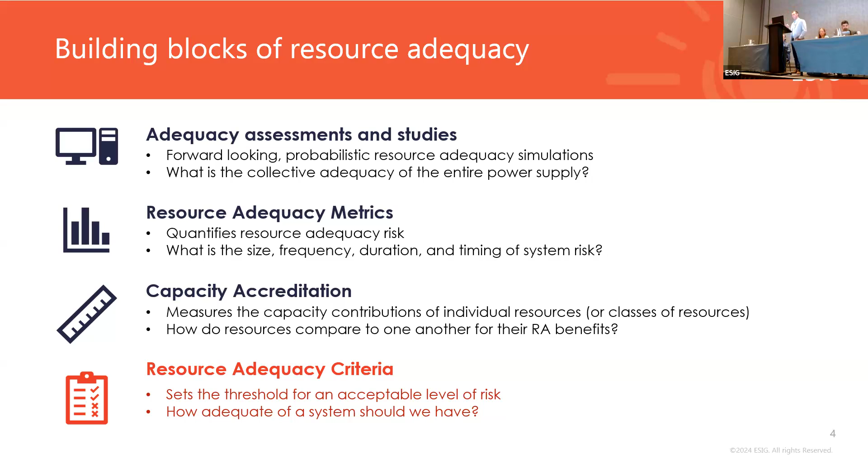So again, when we first started this task force, I felt daunted going in and trying to say this 1 day in 10-year planning framework that we've been using since the 50s, do we want a change to that? It's a lofty ambition. And so before we started, we did several surveys. The first question was, should the industry consider a new resource adequacy criterion? Should we move past that 1 day in 10?

We ran this across 3 different surveys. Nothing scientific about these surveys, but there was an ESIG webinar on probabilistic resource adequacy methods, with 116 people participating in the survey. We had the task force, we got 32 participants, and then we had the IEEE resource adequacy working group with about 30 participants too. An overwhelming 75% of people said, yes, we need to move past the 1 day in 10-year. I was frankly surprised to see that many people on board.

And the second one was, if we had to move away from one resource adequacy criterion and we had to pick one, which one would we pick? And here, this is a little bit of an unfair question because we gave a multi-metric as an option. So we gave people a little bit of an out, and that's what most people chose.

It said really one metric is insufficient, so we need to have a combined approach or multiple metrics. And really, the fundamentals, we go over this in the report, but the limitations of the current use of LOLE at 1 day in 10, and in Europe it's loss of load hours, but a very similar construct around how we measure risk. So right now, in many places, it's a line in the sand, right? We determine a system is either reliable or it's not, whether or not it meets the 1 day in 10-year criterion. In reality, reliability is this continuum, right? And it's all about this trade-off between cost and reliability. And today, again, we're treating in most regions this as a line in the sand.

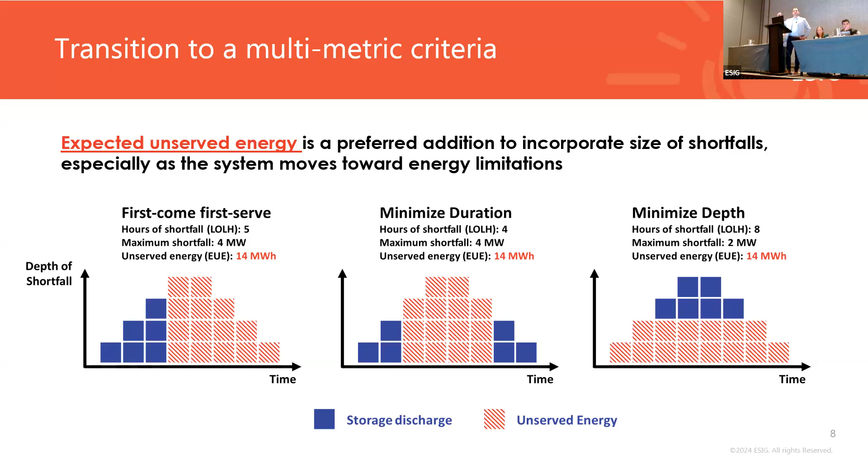And so this is just an example as you move to a system that has a lot of storage as the primary source for reliability, the way you dispatch that storage, you can make your resource adequacy metrics do whatever you want. You can try to make them shorter, you can make them less frequent, but what stays the same across every case in an energy limited system is expected unserved energy. So it's a more stable metric, especially when we look out at an energy limited system.

It's basically saying let's look at my full distribution of outcomes in the resource adequacy study, where we might have hundreds or thousands of samples to choose from. And let's look at the tail end of that distribution and let's cap it. So we could say, I want to make sure that 97% of all of my shortfalls are 8 hours or less, right? And we want to make sure we're capping how bad that worst case can get.

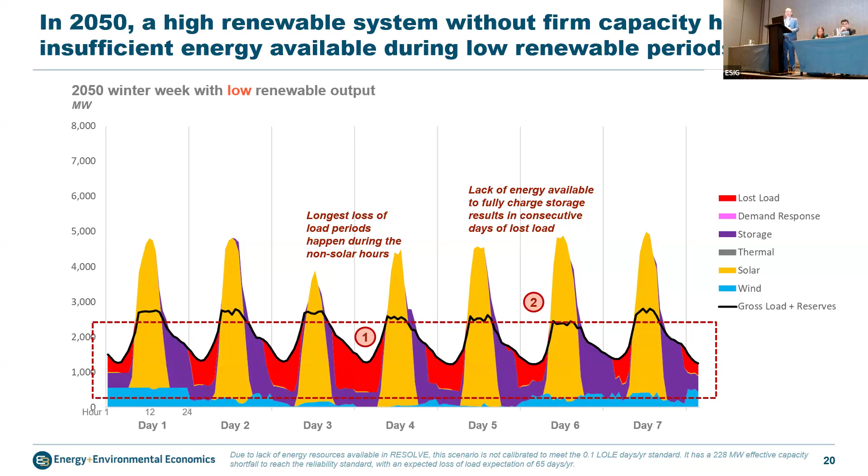They're going to be large energy shortages that occur typically in winter. Even in Hawaii, there are seasonal differences in the amount of solar production, and there may be long periods of cloudiness, and they might run out of energy. And that's what you're seeing on this graph. I know there's some concern among various analysts that the standard loss of load ELCC methods might not be robust enough to address this type of concern in addition to the one that we saw on the previous slide. And so that's what we're going to talk about a little bit in this presentation.

So just taking a step back on how we traditionally consider resource adequacy, we typically will do something like calculate a resource need. We'll do that by running a loss of load model, and we'll add capacity until we meet our standard, whatever that standard is. Usually it's 1 day in 10 years, as Derek said, 0.1 LOLE, but it doesn't have to be. It can be LOLH, it can be EUE, it can be a number of different standards, but you have to have a standard. You add capacity until you meet that standard. The amount of capacity that you add, that's your total need.

And then the reserve margin is the residual calculation from that, where you divide the total by your 1-in-2 peak load, subtract 1, and that's your percentage reserve margin. It's a residual calculation. It's not a thing by itself. That's something that people often lose sight of, but it's useful just to help you understand how much extra I need across a broad variety of scenarios.

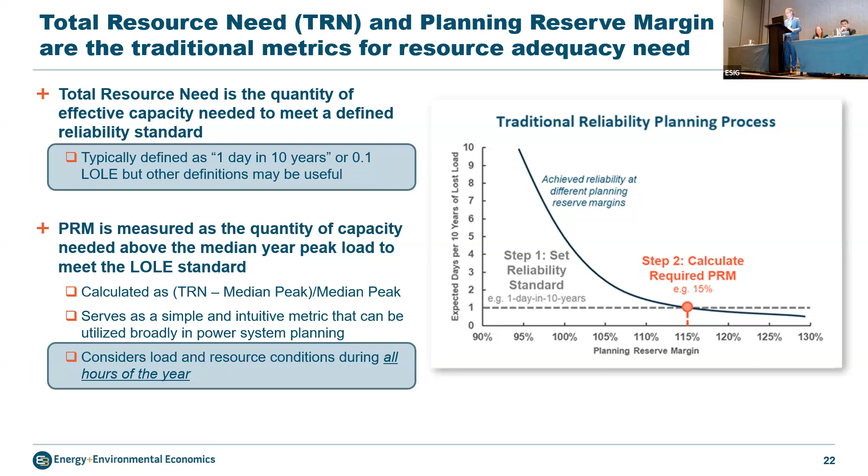Now, this ignores a whole bunch of things that are changing. Our world's getting more complicated. I think it's well understood by now that there are interactive effects among resource types, including cannibalization and diminishing marginal returns. As you add more solar, you push the peak into the evening, the next tranche is less effective. As you add more battery storage, the next resource adequacy problem becomes more elongated, and you have to add more hours to continue to have the same effectiveness.

So that's well understood. It's also, I think, by now well understood that when you add solar and storage together, the whole is greater than the sum of the parts. They complement each other, and so you get more out of them. That's just an example of the type of interactive effects that we now have to consider when we calculate our resource need and when we do our resource accreditation.

Another way of thinking about this is that the way that we've done resource accreditation in the past is kind of nice and simple and linear. We could do it this way because we had small differences in performance among different resource types during the times that matter, and largely no interactions between resources, or at least ones that we couldn't ignore. And we could do performance penalties to incorporate forced outages.

So you could pretty much just add up the nameplate of all the resources, add some extra for the margin in case those resources weren't available when you needed them. And then you built to that standard. And so your installed capacity was just kind of the sum of your nameplate capacity. Nice and simple. But it turns out we were living, we didn't know it, in a linear simplification of actually a much more complex problem.

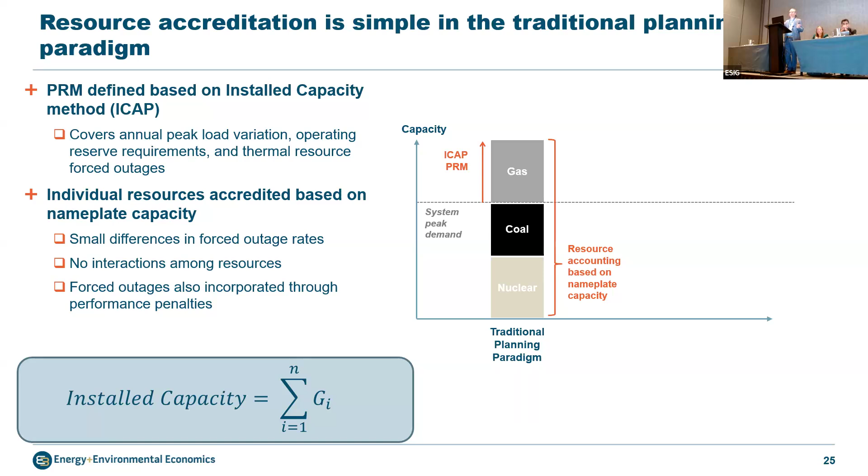What we have now are large differences in availability during the key hours, significant interactions among different resource types. And so our portfolio ELCC, the combined capacity contribution of all the resources, is no longer a simple linear sum of the individual resources. It's now a complex function. And we need to change the way that we think about doing resource need, measuring it, and doing resource accreditation. So it's not just the sum of all the nameplates, socializing the forced outages. We now have to look at each resource on its own and consider how it performs during the most important events.

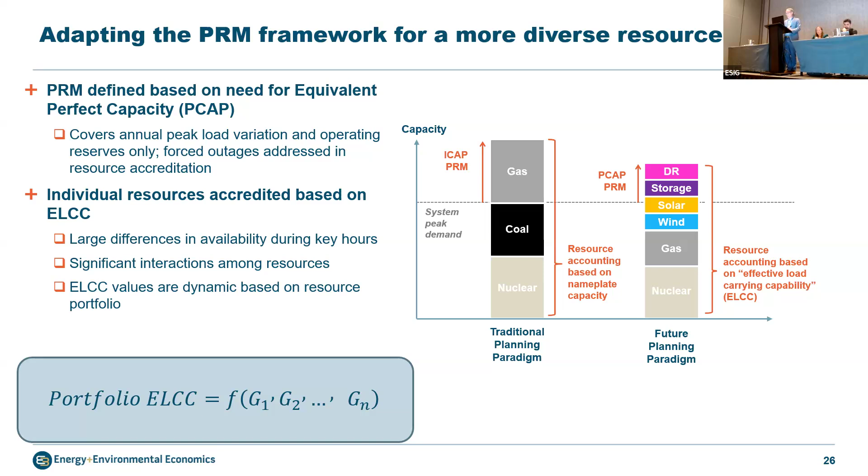Another way of thinking about this is that the portfolio ELCC is a complex function, as I said, of all the resources that make up the portfolio. It has this convex shape that as you add more megawatts, the effective capacity that you get from all of them tends to diminish. The height of the surface is the total amount of effective capacity from the portfolio.

But what we're actually interested in with respect to resources is how much each one helps us meet our total need. So if I make a small change in the total portfolio of one type of resource, then I measure how much that helps me meet that capacity need. That in effect is a partial derivative of this multidimensional surface with respect to that one resource's dimension. So that's the marginal ELCC, and that's the quantity that we're interested in and need to look at when we're thinking about making changes to the portfolio. How much does this marginal change help me meet my total need, whether that's a retirement or an addition of a particular type of resource?

So we think of the total need as a surface, a multidimensional surface that's made up of all the different types of resources that are part of the portfolio. And we'll come back to this surface in a little bit. So just keep that kind of image in mind.

So with that background, now what did we do to test the different resource adequacy methods on Oahu? So just to give you a little bit more detail about how they do it now. Again, I mentioned the hourly energy reserve margin and the hourly dependable capacity, HDC method. So this is a homegrown method that they came up with. They, in effect, make sure to plan their system so that they can have a 10% margin in every hour.

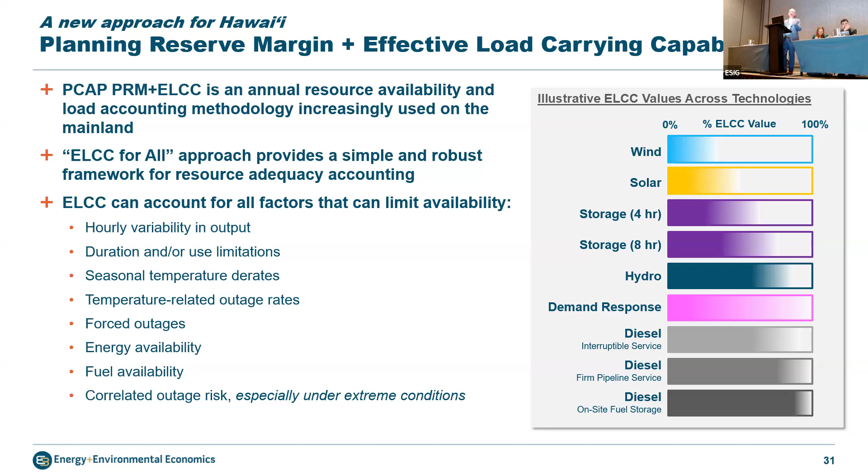ELCC, in our experience, accounts for really all of the factors that can limit the availability of a resource: variability in output, duration, seasonal temperature derates, forced outages, energy availability, fuel availability. Really, all of that goes into the model and affects how the resources perform during your simulation. And it does consider extreme conditions, which, as Derek talked about, are very important.

Back to the surface. So the way that we actually incorporate different levels of wind and solar and battery storage across all the potential different futures between now and 2050 is to take that surface that I talked about before and try to measure different parts of it, the parts that are important for their portfolio construction. And the way that we do that is, in effect, measuring marginal ELCCs at different points along that curve, different saturation levels, and different combinations of wind, solar, and battery storage.

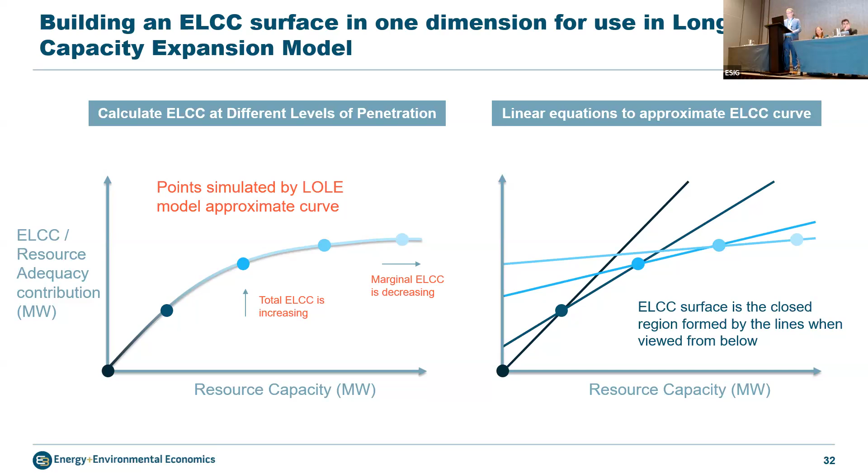We can use those different measurements to make a linear approximation to that convex shape. That's what you see on the right. And then we incorporate that into the capacity expansion model as a series of different linear constraints that say, as I go up that saturation curve, then I piecewise linearly reduce the amount of capacity that I can expect from that type of a resource.

And you can do this in multiple dimensions by measuring different combinations of wind, solar, battery storage. In this case, we use a two-dimensional surface that incorporated both the capacity of solar and the capacity of storage. We've also experimented with three-dimensional surfaces where we also incorporate the duration of storage as well.

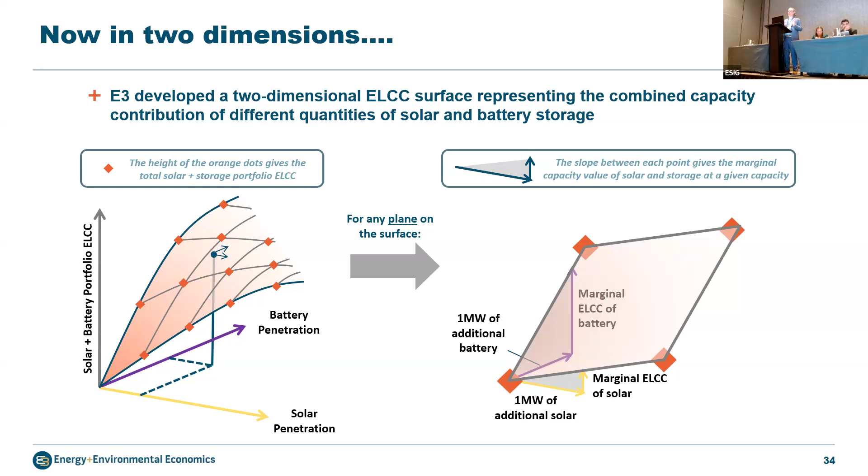So this, again, is all just meant to constrain the solution that the long-term capacity expansion model arrives at, to help ensure that it will produce a resource adequate portfolio. And we hope that it's robust across this wide range of potential futures.

So the way that we then evaluated the different methods against each other was we ran them through the capacity expansion model. That's our RESOLVE model, which we use in Hawaii. And then we tested the outcome in our RECAP model, which is a loss of load model, to see, did the capacity expansion produce a reliable portfolio or not? Or what do we have to do to make it produce a reliable portfolio?

We made them all meet the same 0.1 day loss of load expectation, but there are some differences. And in particular, the differences are on the number of iterations that we had to go through back here, this washing machine between RESOLVE and RECAP, to make the portfolio become reliable. The HDC method, the one that HECO uses today, just one run, 10%, bam, hit the target.

You know, I don't know if they were lucky or good. I think they probably are good because, you know, our brains are really good learners. And I think there's a lot of experience that went into that. And so I think that actually is something that they are comfortable with, they've used, and it worked in this case. We're not sure how robust it is against different futures, but it worked in this case.

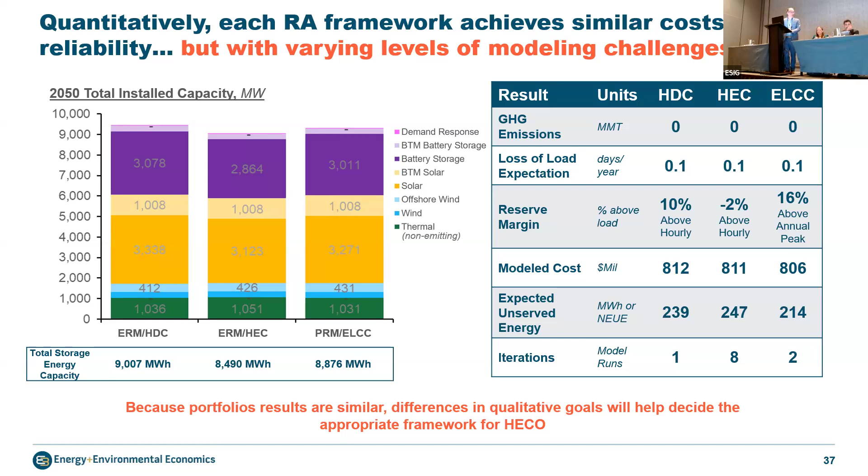And our ELCC method with 2 iterations, we had to make one adjustment at the end to get there. It did have slightly lower cost and slightly less unserved energy than the other methods. So they were kind of really a tie with respect to the portfolio construction. So that really made our qualitative evaluation of the different methods very, very important.

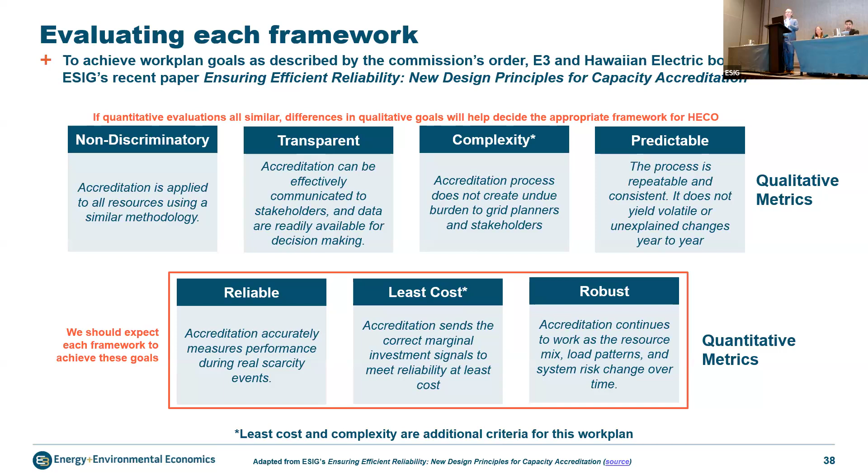And here we looked to the work that Derek and others had done at ESIG on what other metrics we should be thinking about, what other characteristics our systems should have. They should be non-discriminatory, they should be transparent, they should be predictable, they should be reliable. We added a couple: we should have less complexity if possible, they should be least cost. And so we evaluated the different methods using these different criteria.

But the ELCC method is also non-discriminatory. It's ELCC for all. The thermal resources were accredited using the same method as the renewable resources, whereas under the energy reserve margin methods, the thermal was just given basically a nameplate capacity, and it was mostly focused on the performance of the renewables. None of them was transparent. These are black box models. Let's just be honest about that. They're all complex as well. And none of them are very predictable unless you had a lot of experience working with them.

We gave the ELCC method a high mark on predictability because we have a lot of experience working with them. We understand how they work. We kind of have a sense of how things are going to turn out. And we think others will as well as the industry gains experience with these methods. So our clear preference was for the PRM plus ELCC method, and that's what we recommend that Hawaiian Electric move forward with. I will say, we asked the TAP to rate these methods using a similar scale.

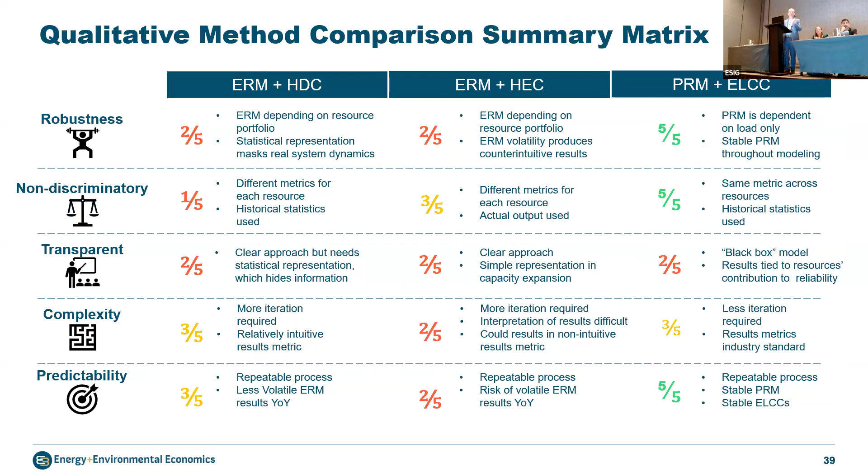Their ratings weren't the same as ours. I think I'll summarize their feedback as saying everyone preferred the one in the middle, the hourly expected capacity, versus the one that HECO uses now, which is the hourly dependable capacity. But there wasn't a strong preference between the HEC and the PRM and ELCC methods.

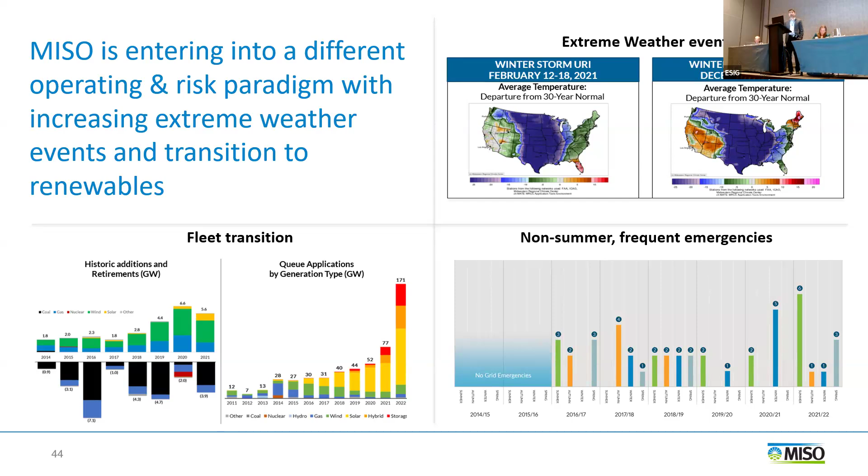So even though our operations paradigm and the associated risk is evolving, bringing it back home to resource adequacy, we still rely on the traditional criterion, right? All of our studies currently use the loss of load expectation study and the criterion of 0.1 in 10, or 1 day in 10 years. I'm not going to elaborate on that, we already heard that from Derek and Arne.

It's a frequency of loss of load. It doesn't cover how deep the issue is in terms of load loss. It doesn't cover the breadth of the issue in terms of how long the loss of load was. So there are certainly several limitations or limited insights that you can gain from that criterion. But it does underpin all of the key components of resource adequacy. So it's not without use. And if you put all the simple problems in the world in one box, resource adequacy would be outside.

But trying to simplify that down, what you need is how many megawatts do you need to maintain reliability? That's our requirement. And then how do you count the megawatts that you have? That's your accreditation. And then what's the price at which capacity would be available? That's your pricing. PJM does an actual capacity market, we have an auction, and different people do it differently.

So coming back to requirements, we have a planning reserve margin requirement across the footprint. And I didn't mention the zones, but our footprint for resource adequacy purposes is divided into 10 different local resource zones. So we have a requirement for each of those as well. And both of those requirements come out of a study that uses our LOLE one-day-in-ten criterion.

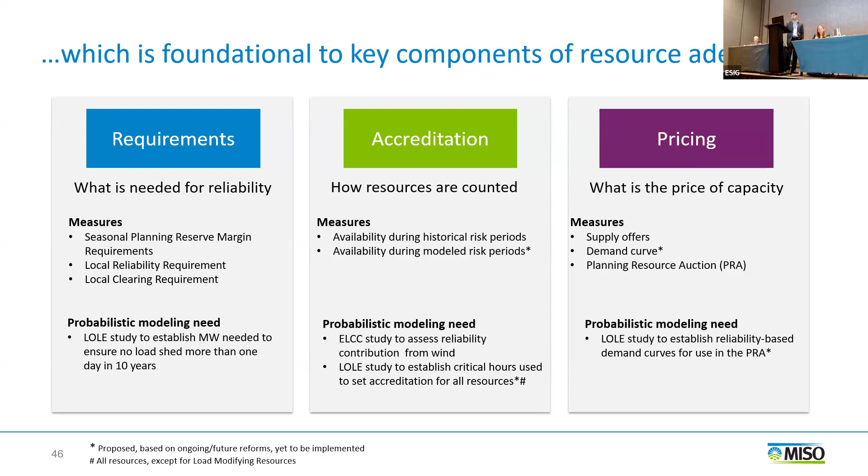And lastly, it's in terms of pricing. So today we use a vertical demand curve that uses the planning reserve margin requirement, or PRM, based on the one-day-in-ten criteria. Going forward, we have a filing active at FERC. We are hopefully going to hear back from FERC soon, where we would then deploy a sloped demand curve, which will again be based on varying levels of PRM around the 0.1 criterion as well. So some of these are future, not all of them are implemented, and we'll see the progression or the continuum of reforms that are happening at MISO.

Extreme left of your slide, again, those are the good old days. We're fat and happy, lots of reserves, lots of coal capacity, never had any issue. So we were content with just looking at the summer as a proxy for the whole year. We would make sure that we have enough capacity to handle like July 15th or August 15th, 2 p.m. in the afternoon, and we are good for the rest of the year. And that actually truly did work out for the most part.

But then we saw those skyscrapers, all those emergencies that started to happen outside of summer. So that was a big impetus for our seasonal construct, which was implemented last year. It was a very, very fast implementation. I guess we filed in 2021, FERC approved in September 2022, and we actually implemented already in April of 2023. So it was a fast implementation, but it did give a lot of benefit. And I won't be able to cover all of them, but for one, we now have seasonal requirements.

And both of the events that I talked about earlier, Uri and Elliott, they were both winter events. So historically, we would have like a 7 or 8% PRM that's calculated from summer for winter as well. But if you look at the winter requirements, they are a lot higher because of those events that are now factored into our modeling. And likewise for fall and spring, which are heavy outage seasons, and that translates into higher requirements for those seasons as well.

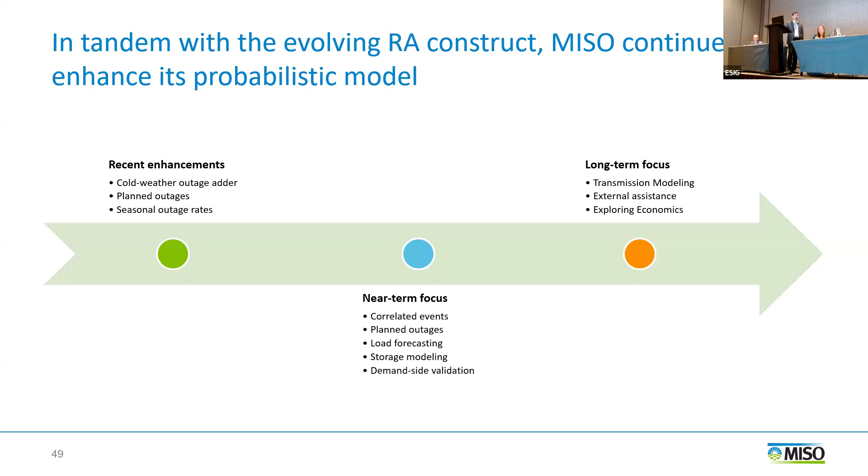And then reliance on external systems, that's a big one, because if you're in an emergency, like if you looked at Uri, the whole Midwest and beyond MISO's footprint, everybody was in an emergency. So if you're relying on external support but everybody is grasping at straws, how do you count on that support during times of need? So we are going to look at what happens if MISO is going solo, and what the requirements would look like to that effect.

So certainly, as I said, there are drivers for changing the criteria and making it better. But then if you look at the trade-off, there are so many dependencies downstream, right?

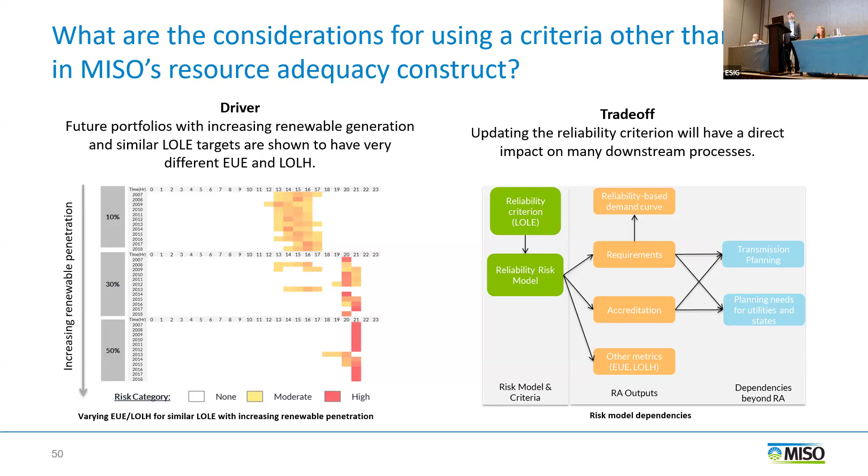And then it's not just us. We talked about long-range transmission planning tranche 2, or LRTP tranche 2. So some of the benefit calculations are also based on that. And our members use what we come out with in terms of resource adequacy for their integrated resource plans as well. So there's lots of considerations before we can move on.

And then certainly we have many questions and many potential answers, but to tie back to some of both Derek's and Arne's presentations, how do we convince ourselves that changing the criteria, even though everything says you should change, is going to be better? And what does better mean? So clearly we're in the space of more questions than answers at this time.

So currently our answer is it depends. And we are going to work on this in the next several years before we are able to actually pull the trigger. So with that, I think that's my last slide. Yep. Thank you all.

Thanks, Durgesh. Really exciting to see some of the ESIG task force recommendations getting put into practice. So thanks for sharing that with us today. And we'll look forward to hearing the next round of updates.

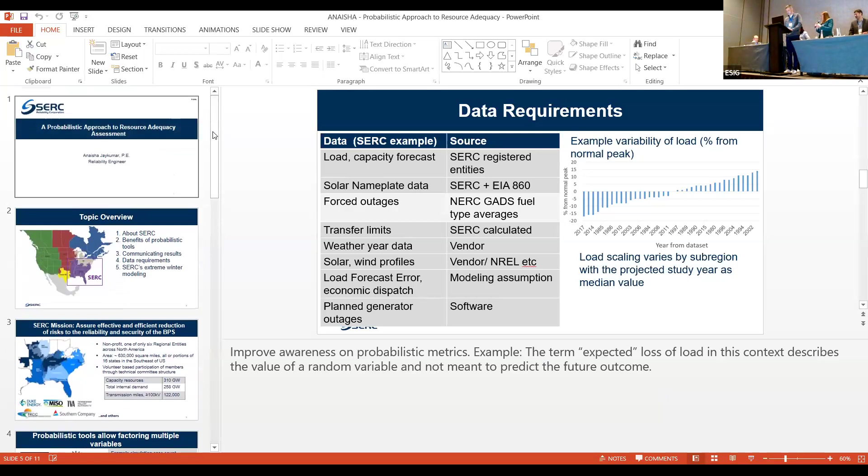So our next speaker is Anaisha Jaykumar, who is a reliability engineer from SERC Reliability Corporation. So we're staying stateside for this speaker while we're switching slides. And so this is our last US-based presentation before we head over to Europe and hear about their more coordinated approach. So that's a pan-European approach. So Anaisha, I think we're ready.

Also, it's really raining outside, if you didn't know. Hopefully everyone is staying awake. So if you're struggling with energy, just go walk outside for a second and come back. That'll refresh you. Let me do a mic test. Can you hear me okay?

Good afternoon, everyone. I'm Anaisha Jaykumar. For those of you who may not be familiar, SERC is one of 6 regional entities under the North American Electric Reliability Corporation, and we're in the Southeast. A couple of years ago, we started our journey of doing probabilistic-based resource adequacy assessments in-house.

So for today, I'd like to focus on our model, some of the takeaways, but more broadly on some key concepts that may not always be obvious in probabilistic-based modeling. And hopefully that also adds some context on how we should be applying our results, knowing that they can be very statistical. So just some practical pointers on what we can take away from them. I'll also be talking about our extreme winter modeling, which was very insightful, particularly for a wide region that has a lot of diverse geographic climates.

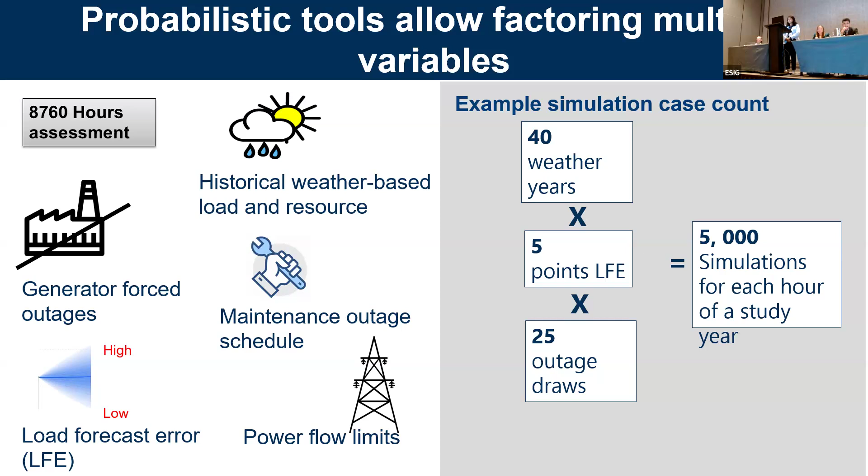Something I failed to mention here is, for the SERC region, for the sake of planning, we choose multiple assessment areas. So I have here SERC Central, Southeast, East, Florida, parts of MISO, and PJM. And for our model, we do have power flow limits between them.

So although our stakeholders might have their individual resource adequacy models, they definitely see the benefit of a region-wide planning model. And like was mentioned in another session, there's a benefit of seeing what's beyond our own system. So some assumptions that may not be applicable are sometimes captured very well in a region-wide model.

Here are some data requirements that we used. And I added a slide here mainly to point out that when we look at our results or results from different regions, we want to be mindful of what data and what assumptions are being used because they can have a very big impact on the results. And so to give you some context, I put some examples here.

So for load capacity forecast, our SERC registered entities provide data directly to us. So we have access to that. For solar nameplate, we realized that it's important to supplement it with EIA 860 because there were some gaps, particularly for solar systems less than 75 MVA connected to our systems. So we were seeing a lot of benefit in supplementing our data set with the EIA.

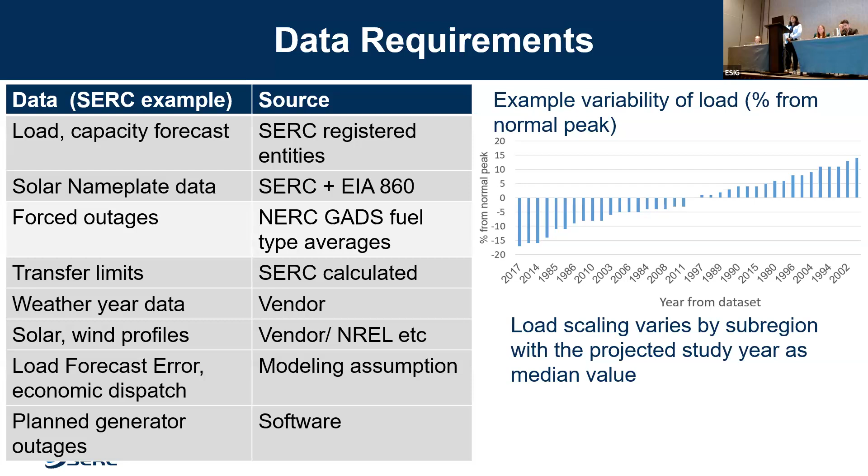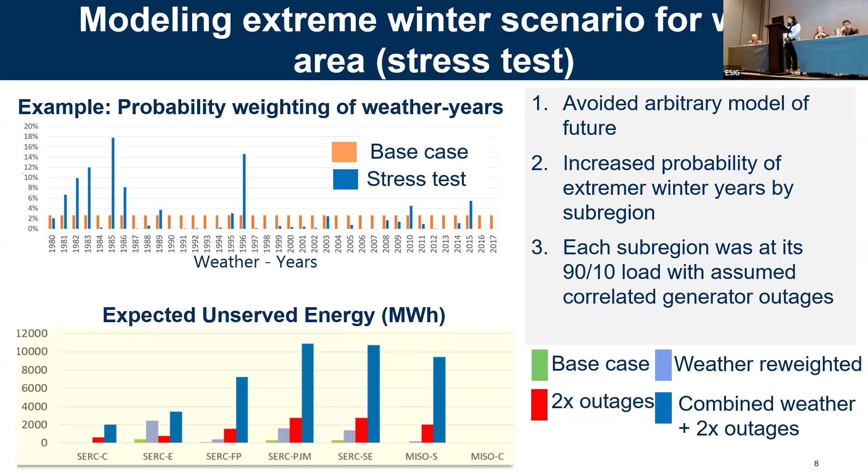So to summarize, we are sharing our experience so that others might benefit, those looking to perform probabilistic assessments, but also those looking to read reports and see what can we take away from this. It's important to also consider the practicality of what assumptions and data goes into it, knowing that we'll never have perfect modeling capability or perfect data.

A question I often get is, how do we use historical weather data sets to predict the future? And maybe just one interim solution like we used is by either increasing the frequency of occurrence of certain extreme events or increasing the intensity of them.

I also want to highlight that our stakeholders definitely saw the benefit of a region-wide model in supplement to what they already perform. And while we might lose some granularity of those, there is still a lot of insight to be gained from the region-wide modeling.

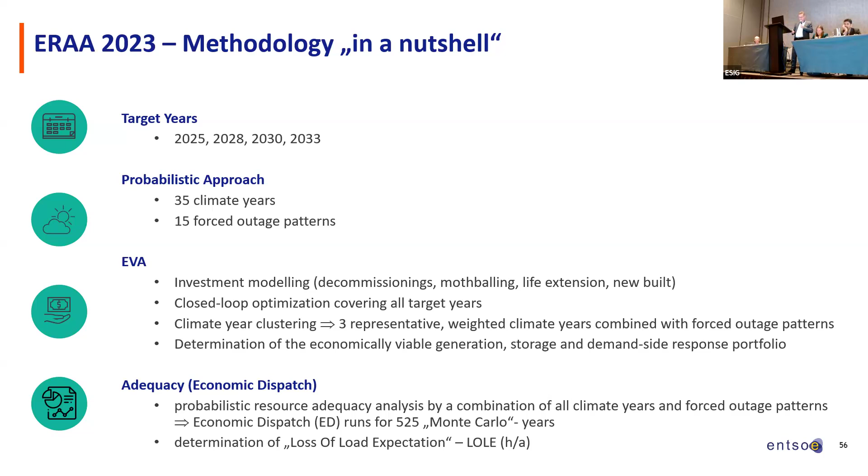The input you need there is about which technologies, which assets are subject to an economic viability assessment. This covers all thermal generators, but also batteries, new gas-fired or hydrogen-ready generation capacities, as well as demand-side flexibilities as expansion candidates, and the corresponding techno-economic parameters are also needed. So some financial data for the modeling, like capex, risk premiums, hurdle rates, but also the different costs and prices typically needed for investment modeling.

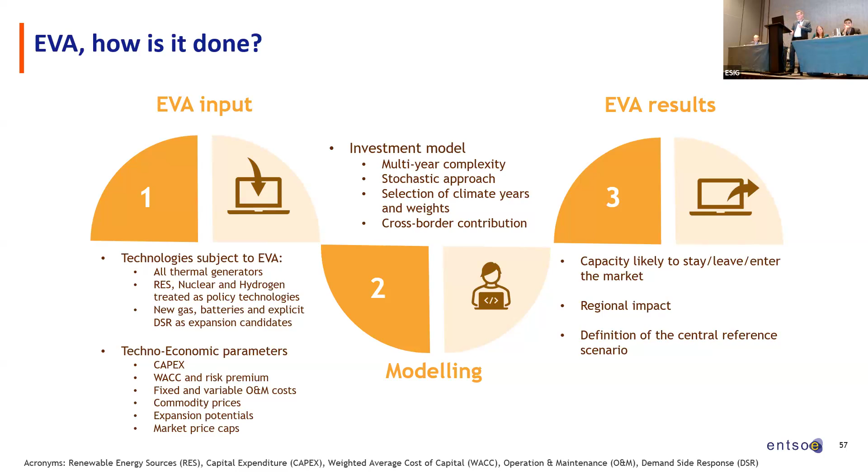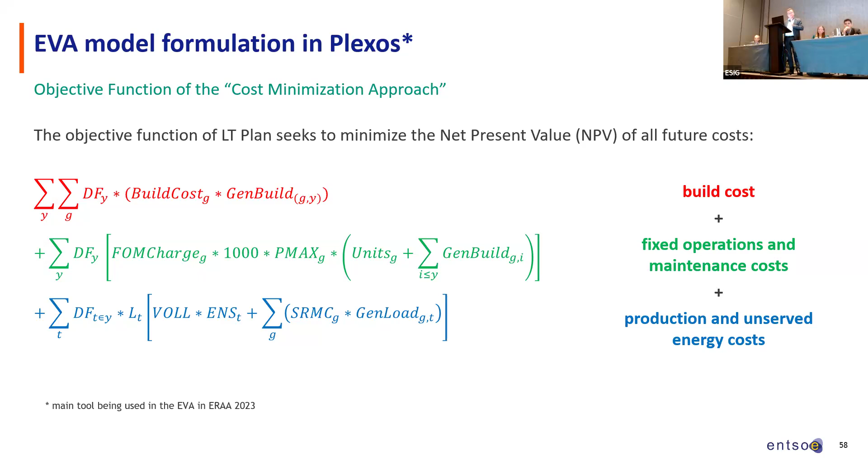All of this together is put into the model with the characteristics as given here in the slides, and as an outcome, you get the changes in the portfolio compared to the input data which were collected from the TSOs. We currently use the so-called overall cost minimization approach for this investment modeling, which consists of a single objective function covering all target years together. There's one big optimization problem, and in this objective function, I will not explain the single variables, but the 3 categories you can read here: the build cost, the fixed operation and maintenance cost, and the variable production and costs of unserved energy.

Having said that it is a single large optimization problem, the computational challenges of this investment modeling are huge and need some simplification. This simplification is done by clustering the climate years. As said, we had the input of 35 climate years, so we cluster them by some clustering methodologies, not to be explained in this short presentation, but the outcomes are 3 clusters, and each cluster of climate years is then represented by 1 climate year, which has a weight to replicate its occurrence.

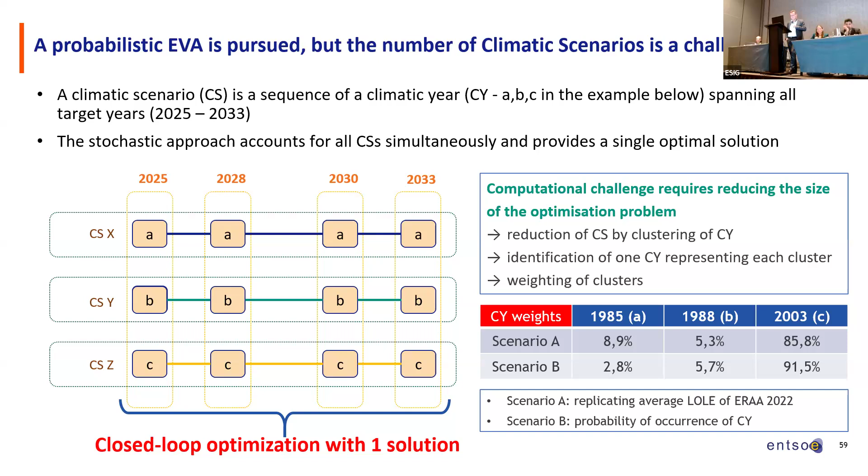So we have used in this ERAA 2 different scenarios, which are distinguished from each other by the weighting of the climate years in the clusters. There's so-called scenario A, where the clustering and the weighting factors try to replicate the average LOLE we had in last year's edition of the ERAA. That was done upon request of the regulators, ACER. And the second scenario is a clustering which represents the probability of occurrence of each climate year in the clusters. So that was a brief sketch of the investment modeling.

The economic dispatch modeling for the adequacy analysis is typical, as said already, Monte Carlo simulation, where we combine the time series for each climate year made of wind, PV, and so on, and demand time series with the outage patterns, and conclude then in these 525 Monte Carlo years to be investigated. And the adequacy metrics concluded from the adequacy runs are the loss of load expectation and the energy not served or expected unserved energy, as defined here.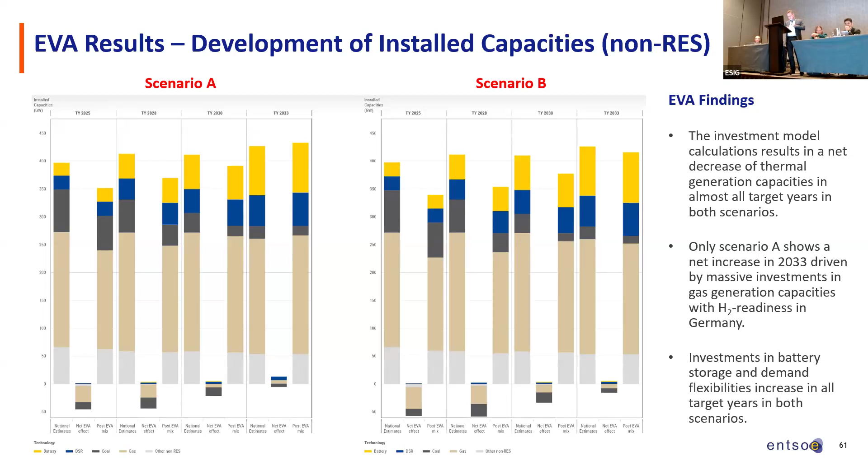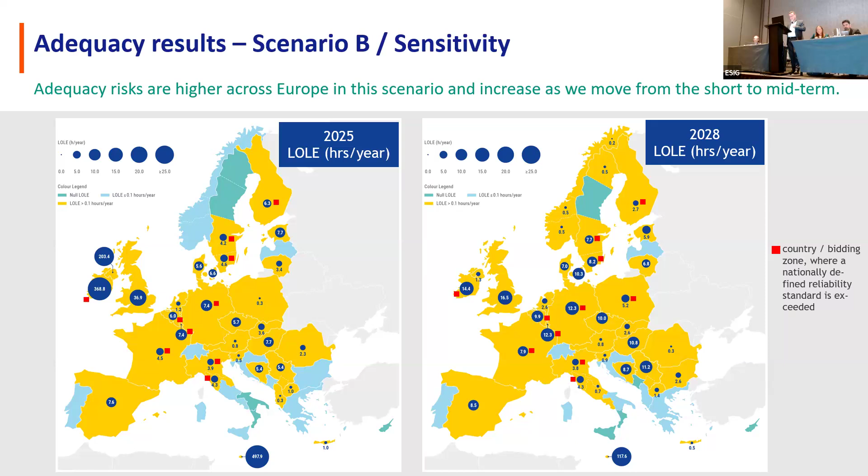So in total, we expect increasing adequacy concerns throughout Europe in more countries, and they become more severe in terms of the number of LOLE hours expected. So the same exercise for the other scenario, comparing the two scenarios against each other. You see that in scenario B you have in general higher LOLE values compared to scenario A, but the trend over the target years from 2025 to 2028 and then 2030, 2033 is the same. It simply increases. So the LOLE values become higher, and the number of countries as well where the defined reliability standards are exceeded.

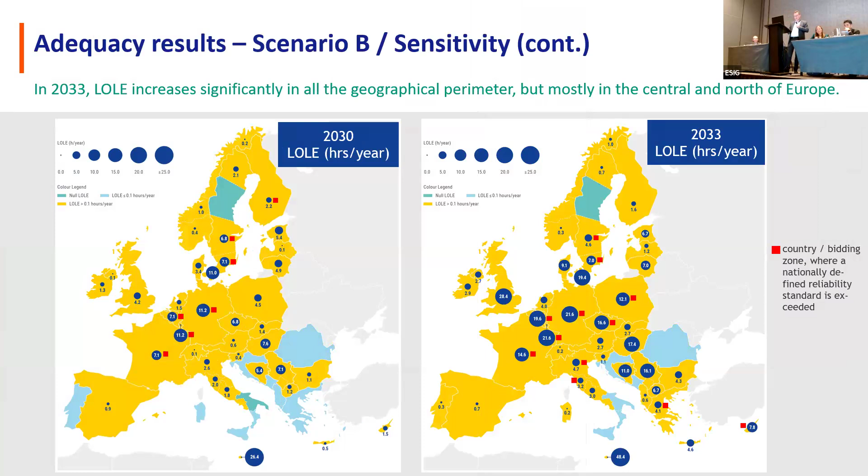But what is already on its way is that we will introduce a kind of capacity mechanism in terms of a power station strategy, as we call it, where the core element is to build up to 10 gigawatts of hydrogen-ready gas generation capacity by 2030. 10 gigawatts is actually 10 gigawatts less than needed. What we would need in Germany alone to be able to meet our reliability standard in all target years would be 20 gigawatts, if not even more.